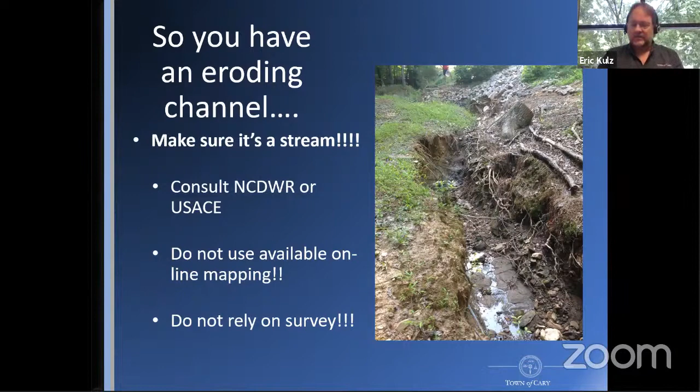This is indeed a stream, but you want to make sure that it's a stream. So the first thing you should do is consult the State Division of Water Resources. They have positions at the regions specifically involved in going out and doing stream determinations to figure out if what you have in your backyard is a stream or if it's just a ditch or some other kind of stormwater conveyance. One thing you do not want to do is depend on various online mapping to determine whether something is a stream or not. You also don't want to rely particularly on a survey. And I'll get into that a little bit more in just a little bit.

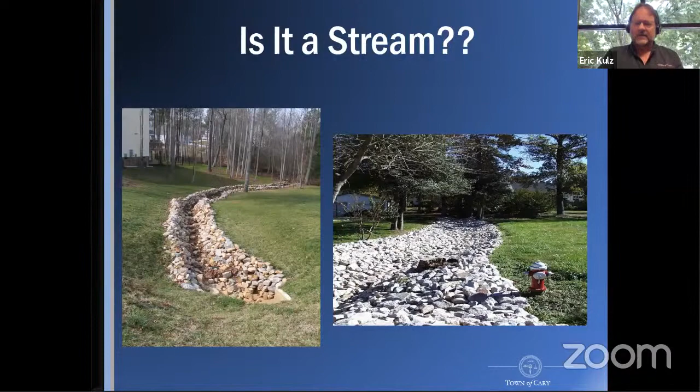So here's a couple of different drainage features. The one on the left is not a stream. It's just a drainage conveyance from a culvert. The one on the right actually is an intermittent stream, but you can see they both look pretty similar. So that's why it's really important up front, before you decide to do anything, certainly before you start doing any kind of digging or placement of rock, find out whether it is a stream.

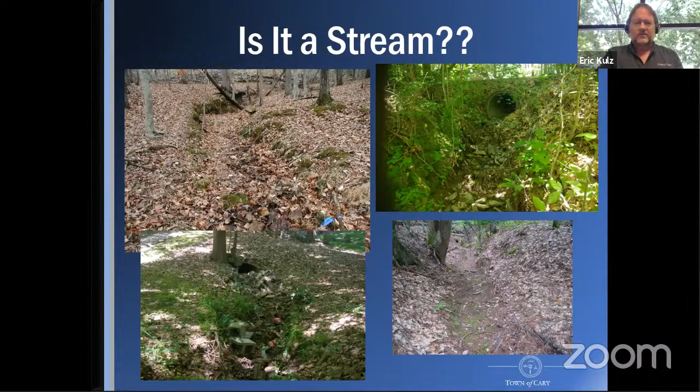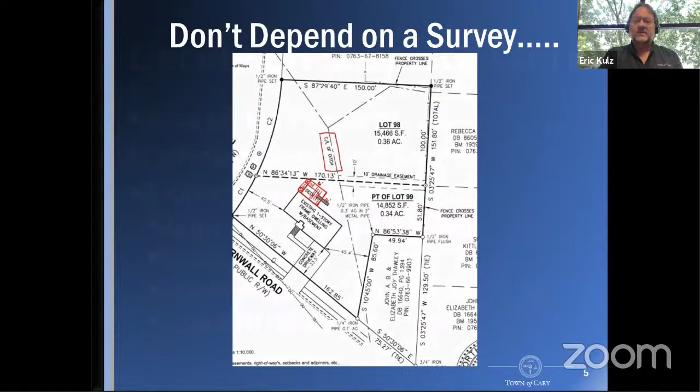You've got to decide on a scope of work for your project. Why are you doing the project? Are you stopping erosion? What's the purpose of the project? What are the limits of your project? Are you just doing it on your own property in your backyard?

Do your neighbors have similar issues, and would there be some advantage, or would it be good to combine projects and do it with a number of your neighbors? You have to identify your project constraints. Lyle's going to talk about some of the regulatory considerations, whether you have to get permits or what kind of permits you need. You have to look at things like access issues.

Do you have the ability to get a piece of equipment down to your property? Is it going to come across your property? Is it going to come across neighbors' properties? Is it going to come in through HOA property or even town property? Are there easements and encroachments that you have to worry about? Do you need to get encroachment agreements? And cost is most certainly something that you're going to need to consider before heading too far down addressing an erosion issue in your yard.

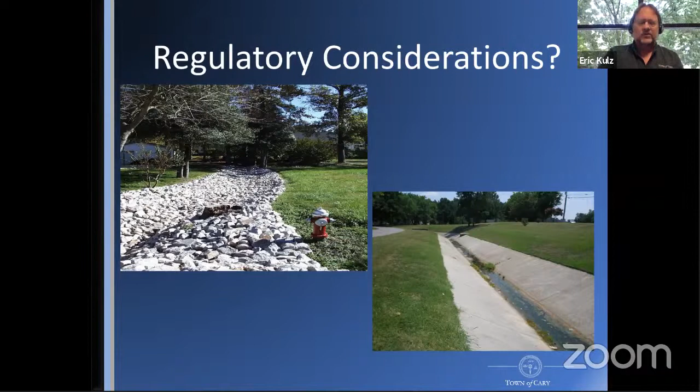The town's going to have something to say about that, depending on how deep the sewer line is, whether it's a ductile iron line or a PVC line. And you may need to get an agreement. You may have to get a permit or enter into an encroachment agreement to use that sewer easement to come down here to do work on your property.

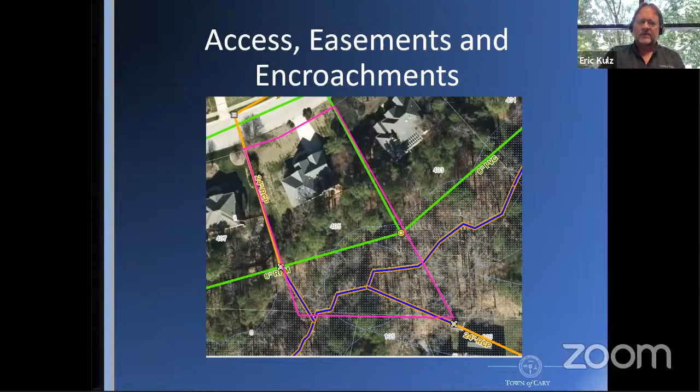It's important to figure out whose project it is. Okay, if this is in your backyard and you've got an exposed sewer line, guess what? That might not be something you need to do. It might be something that the town will come in and do. So again, it's really important early on to have someone from the municipality come out and take a look, because if it's an exposed sewer line, that's not yours to fix. That may be something that the town will fix.

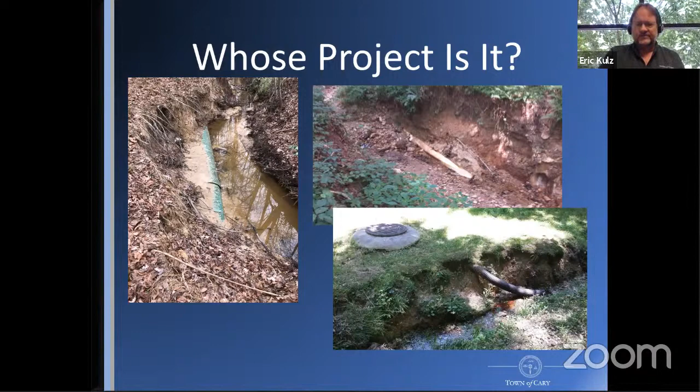So again, municipal considerations. What kind of things is your town going to be looking at? Are there utilities in the project area that they're going to have to take a look at and possibly impose some restrictions on what you can do? Things like how heavy your piece of equipment can be or how it's going to get down to your property.

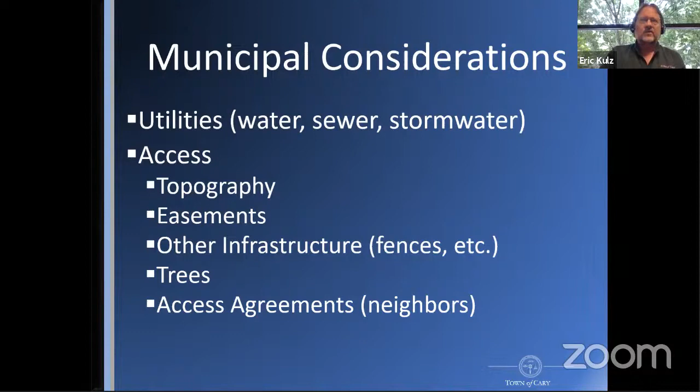We're gonna look at topography and easements and other infrastructure. Are there fences and things that you're going to have to look at? Are you going to need to cut any trees? Cary has some champion tree ordinances that if you have a really big tree, we may not want you removing that tree. And then you may also need to get access agreements with neighbors if your contractor, in accessing to get down to the back of your property, is partially crossing onto neighbors' properties.

So here's a residential lot. You see here on the left-hand side is from our GIS. Now the stream channel is shown off the property, but in this specific case, it was actually on the property. So the little red circle denotes where the citizen wanted to do some stabilization. It was a small area, but you see when we turn on our utility layer, we've got some sewer lines in there. So here's a survey of the property, and you can see the sewer easements along the back of the property, a drainage easement along the back of the property.

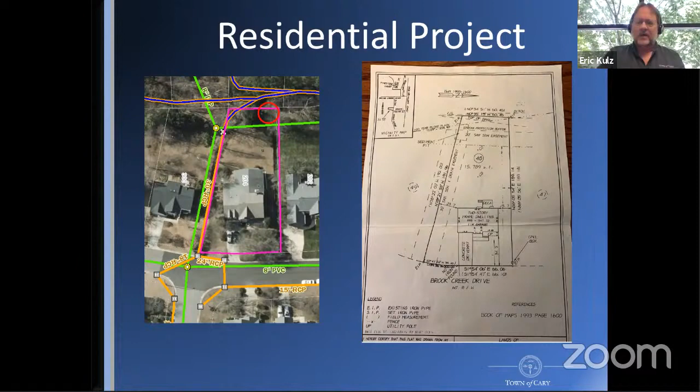So we asked the citizens, said, well, we would like to see a plan of what you want to do, since you will be working close to our sewer line. We want to see how you're going to get down to the property. So the citizen had their contractor draw up some plans. So here's a cross-sectional plan. You see he's planning on doing work on just one side of the stream. And they're going to stabilize this bank that was eroding back toward his house. And here you see a kind of an overhead view.

Here's the stream down here, and here's the area where they're planning on placing rock. And then here, or actually, this is not overhead. This is a view facing, so as if you're standing here and facing the work area. And then here's your overheads where they've got this stream bank erosion here. Oh, here they're showing where they're placing the rock.

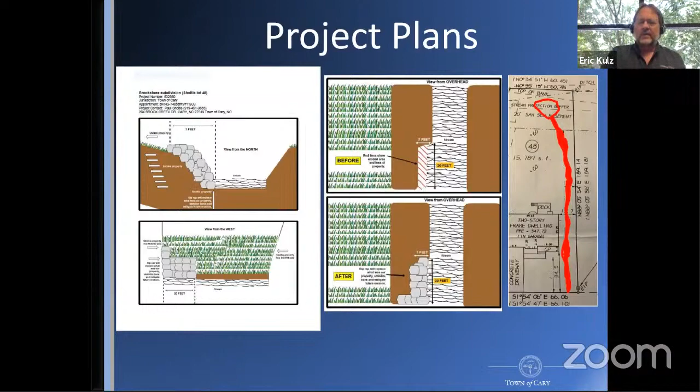And then finally over on the right here, you see, we said, well, you've got an easement and a sewer easement along the left side. We're concerned about you bringing equipment down there. So they showed us this survey with the red markings, which shows they're going to take the equipment down the right side. That's the kind of stuff that we want to see when they come in to talk to us about the project.

Okay, here was an HOA project. This again was in my neighborhood. You can see here that the stream is eroding up to this greenway. This is a private greenway. This is owned by the HOA, and they were concerned that the greenway was going to get undermined. Now there is a sewer line through here, and they did come to us and say, so you have a sewer line in here. Is it something you need to do anything about?

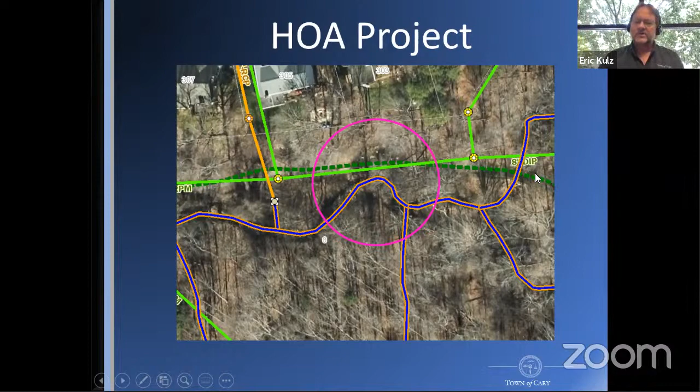And the town came back and said, the sewer line's pretty deep. The stream's not up to it yet. So as far as the town's concerned, they're going to just watch and wait. But the HOA felt they needed to go ahead to protect their greenway. So they went ahead with the project. Here's an overhead view. There's that sewer line running along there. This is the area where they were going to do the stabilization, and the greenway trail comes right through here as well.

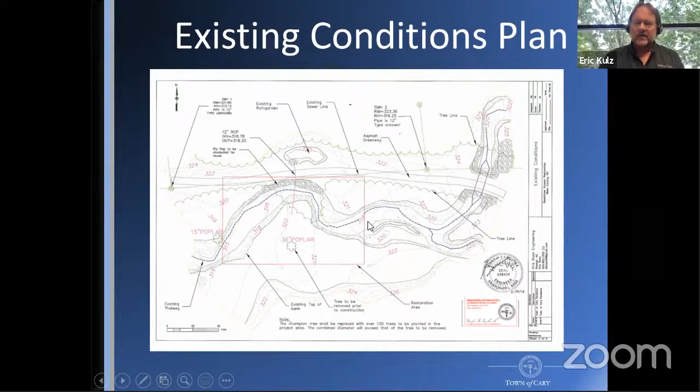So they actually brought in an engineer on this project who prepared some plans. Okay, you can see here's the area of concern where it's eroding. There was some riprap placed there, but the riprap was not doing the job. Here's the plan showing what they intended to do. The former path of the creek was up this way. You can see they're going to come in here. They're going to reconstruct the channel further away from the greenway.

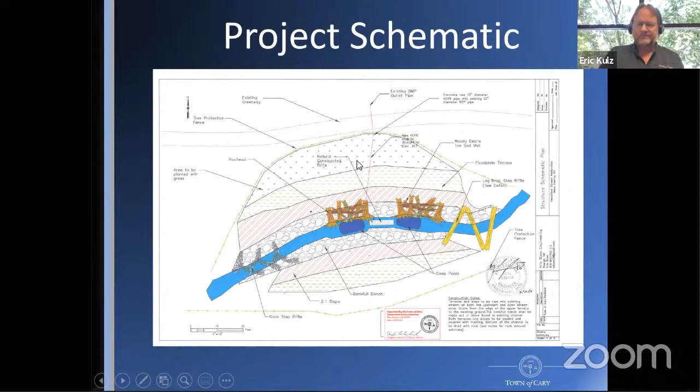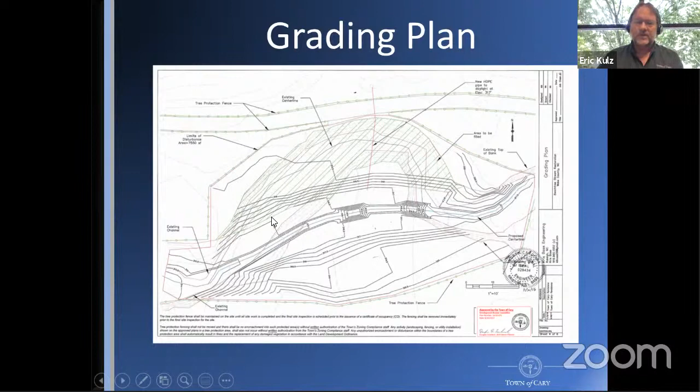And then these are just different areas where they're going to be doing filling. They're going to create a floodplain terrace and plant that up, and then a fill slope here. And then here's their grading plan where they're showing, here's the old channel. They're going to backfill here. This is showing the new slopes and the relocated channel.

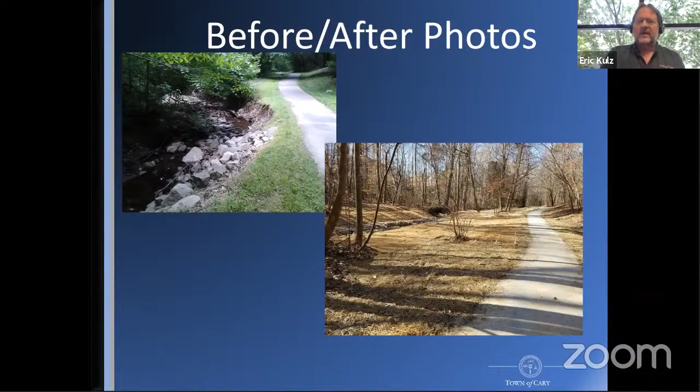This project was paid for totally with HOA funds, but it's still the type of project that we're talking about with the CCAP program. And they had to submit all those plans and stuff so the town could really take a look at what kind of work was being proposed.

So in summary, if you think you have a problem in your backyard, contact your municipality, probably someone in stormwater or engineering, have them come out and take a look at what you have. Got to figure out, is it a stream? Because if it's not a stream, you probably don't have any permitting issues. There's a lot more flexibility if it is just a ditch or a drainage way. Is it a problem that needs fixing?

Sometimes streams naturally erode. That's something they do. In some cases, while you have some erosion going on, it's very slow. It's not really doing any damage, and it's not necessarily something that requires a resource to be put to it. You want to develop a scope of work. Are you going to do it yourself? Are you going to hire a contractor or a consultant? And then what are your costs, and are there options for funding?

You have the CCAP program through Soil and Water Conservation. You have a number of programs available through the state that may be open to you, maybe not as a backyard project, but if it's an HOA project, a larger scale project. You need to figure out what kind of permits and permissions you're going to get from the federal and state agencies, and what kind of submittals you're going to have to the municipality. In the town of Cary, you don't necessarily need permits, but sometimes you're going to have an encroachment agreement if you're using a sewer easement to come in.

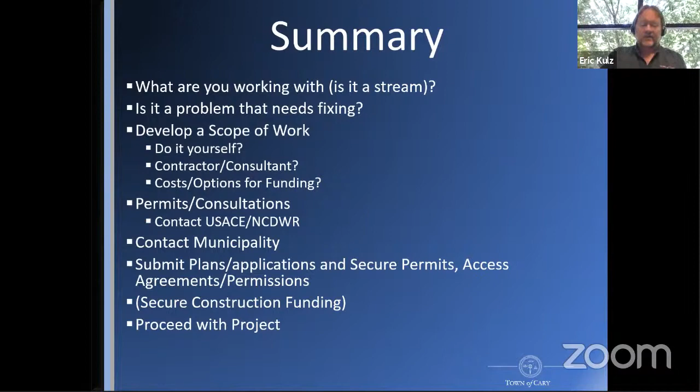Then you secure your construction funding if you are getting funding from an outside source. And once you get all your approvals, then you proceed with your project. So if there's any questions, I'm available to answer them.

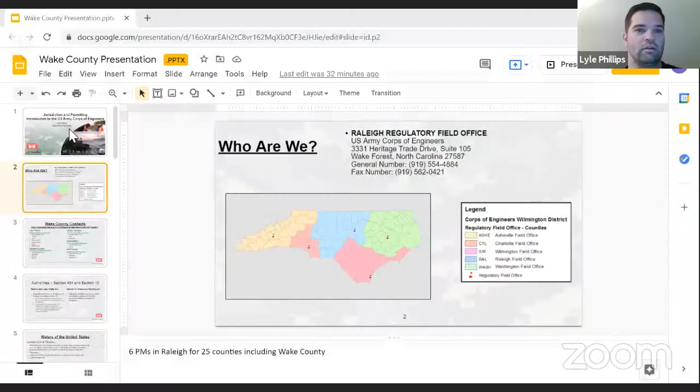Can you see my screen now? Yes, we can see it now. Okay. Sorry, I'll have to start over.

No problem. Again, Lyle Phillips with the Army Corps of Engineers. Introduction to the Army Corps of Engineers. We're going to talk about who we are, some of our authorities, the jurisdiction of the Army Corps of Engineers, as well as some permitting.

The Raleigh Regulatory Field Office is located in Wake Forest. Look in the left-hand corner here. You'll see the state of North Carolina is divided into 5 areas with 5 regulatory field offices. The RFO, there in the middle, you can see the counties outlined in blue are what the RFO is responsible for. Currently, we have 6 project managers in the RFO, and I think we are responsible for 25 counties at the moment.

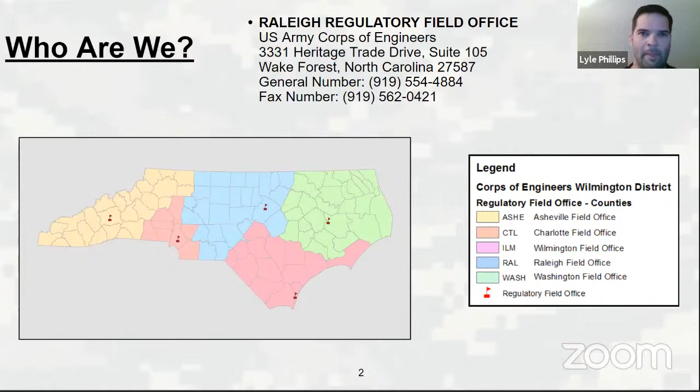Getting into authorities. The Clean Water Act was developed to restore and maintain the integrity of the nation's waters. Within the Clean Water Act, Section 404 established a permit program to be administered by the Corps of Engineers. Under Section 404, the Corps of Engineers regulates the discharge of dredged or fill material into waters of the U.S. Under Section 10 of the Rivers and Harbors Act, the Corps regulates activities in, over, and under navigable waters.

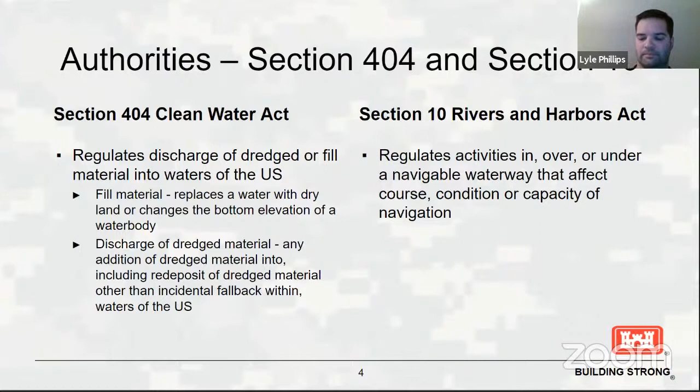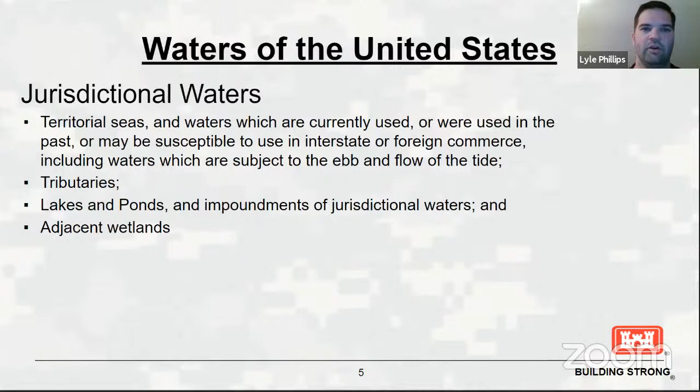Waters of the United States, jurisdictional waters, they're all used kind of interchangeably. I'll probably continue that throughout. They all mean the same thing. And what I'm talking about is territorial seas, tributaries, lakes, ponds, and impoundments of jurisdictional waters, and adjacent wetlands. I'll note that this is what is jurisdictional right now.

Now that we've gone through what is jurisdictional, it's also important to note where our jurisdiction starts. The term we use is ordinary high water mark. That is where the Corps' jurisdiction starts for certain features. In Wake County, there are areas that have riparian buffers. That can be a state implemented thing. It can also be by your local municipality. Just want to make it clear, the Corps does not determine or regulate riparian buffers.

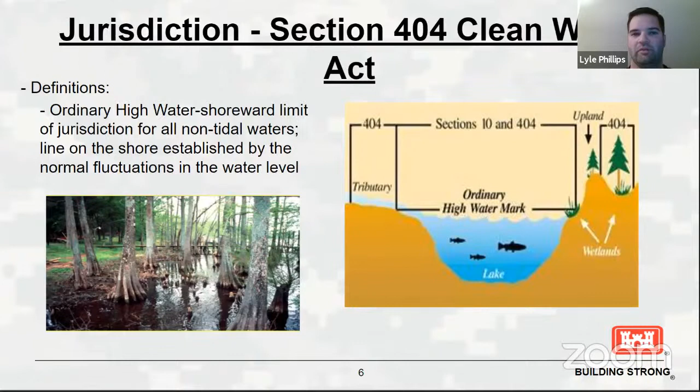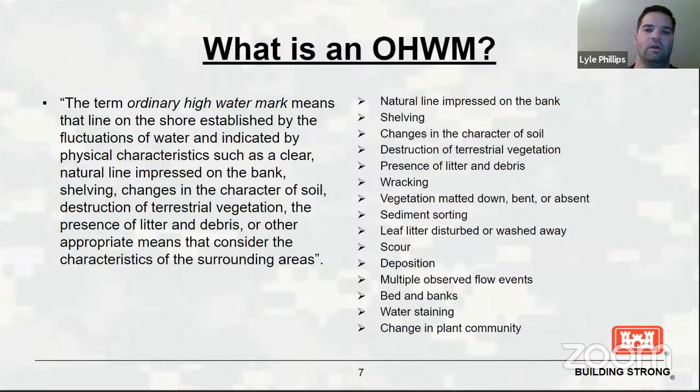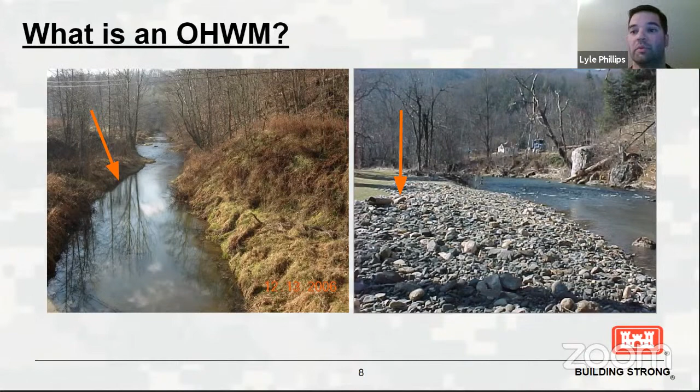Here are some examples of some smaller systems. So again, strong bed and bank, pretty obvious on the left hand of the slide, not so much on the right hand. But it's important to note that this is more common what we see. There's very little question about the first two images. These two, more common and can be more difficult.

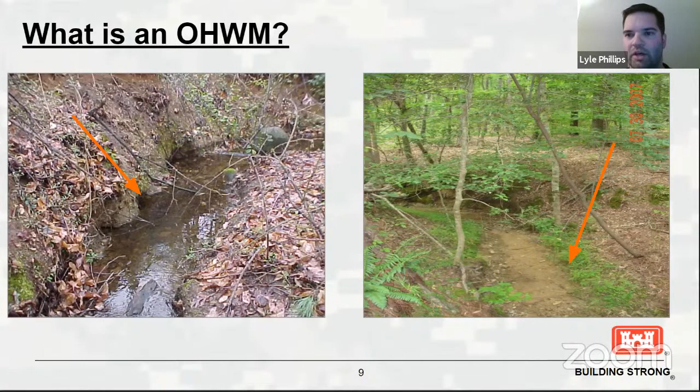I think it's also important to note there's no water in the image to the right-hand side. That doesn't necessarily mean it doesn't have an ordinary high water mark. With the indicators on the previous slide, in this area you have a change in plant community. You probably have a change in soil characteristics. You may have sediment deposits. Those are all indicators of ordinary high water mark.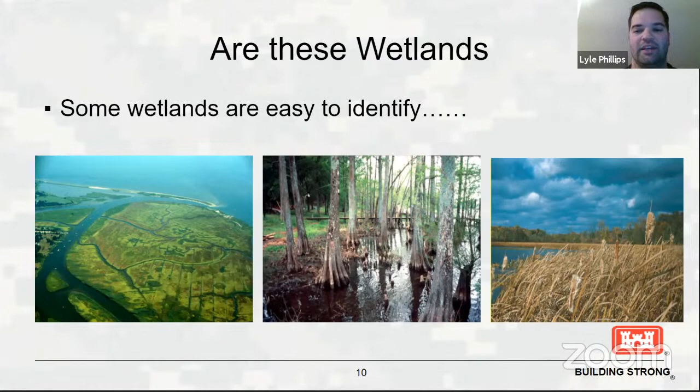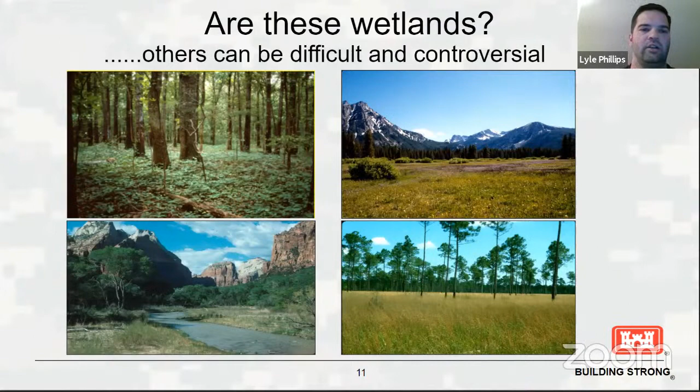Wetlands. Some wetlands are very easy to identify. Like streams, cypress swamps and wetland marsh, they are very clear. Others, not so much. Particularly in Wake County, what we're going to be looking at most often is similar to the image in the top left-hand corner. This is characteristic of a bottomland hardwood forest or a headwater forest wetland. These are most common in Wake County, and it may not be obvious that you have a wetland on your property.

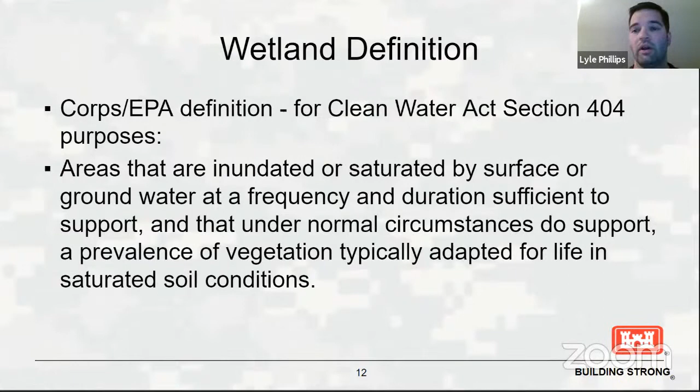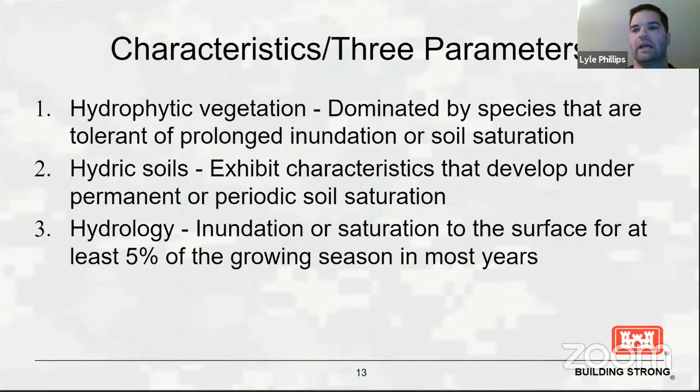The definition of a wetland, I think the takeaway from this is inundation and saturation frequent enough and for a sufficient duration that vegetation will prevail in saturated soil conditions. So that is what we are looking for, and how we do that is by these three parameters. The Corps uses a wetland determination form. We fill that out in the field. So it's boots on the ground. It's something that has to be done physically. We'll be looking for hydrophytic vegetation, hydric soils, and hydrology at a certain area.

So once we establish if there are jurisdictional waters on the property and potential activities may impact these, then we get into permitting. Types of permits. Individual standard permits are for larger scale impact projects. These are for projects whose impacts are more than minimal. They exceed the thresholds of the nationwide permits or the regional general permits.

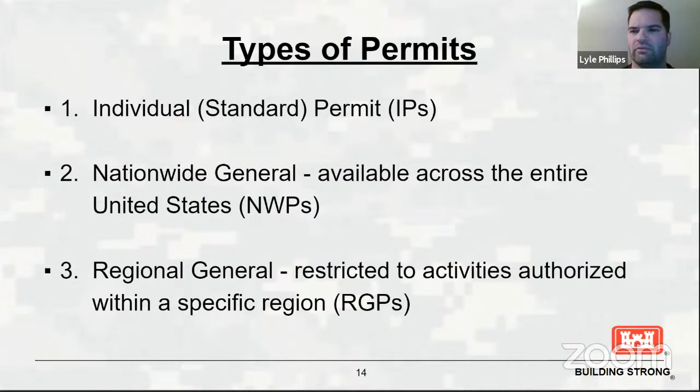Nationwide permits, we're going to talk about those more in depth. They are by far the most common. They're most common in Wake County. Regional general permits are specific to a certain region, specific to a certain activity in that region. I believe we have 12 regional permits at the moment.

Nationwide general permits. We currently have 58 nationwide permits. These are for commonly recurring activities that have minimal cumulative adverse impacts. Nationwide permits have standard conditions, regional conditions, and may or may not have special conditions. Some require notification to the Corps. Some do not require notification to the Corps.

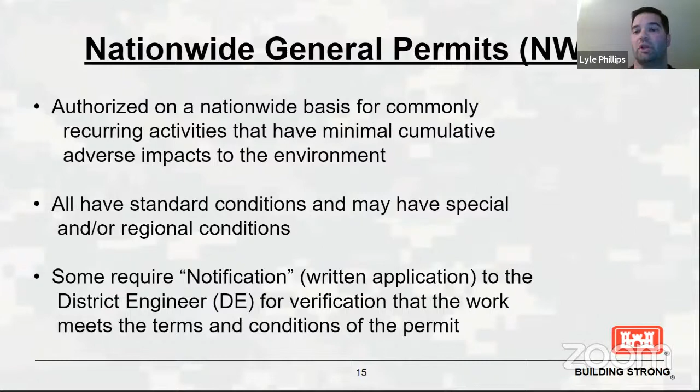It's important to note that if your project does not require notification to the Corps, you still have to follow the conditions of that permit. So you are operating under a permit, even if you do not have to tell the Corps that your activities are taking place. Those conditions still apply. We're going to go through some common permits in Wake County. This will lead right into Eric's presentation.

This is very common for eroded streams. Nationwide Permit 13, Nationwide Permit programs for common activities. This is for bank stabilization. As with all nationwide permits, there are conditions. I've put some of the ones for Nationwide Permit 13 here.

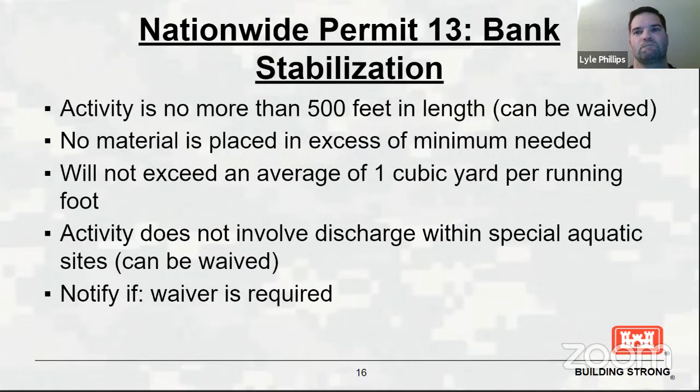Nationwide Permit 29. This is for residential developments. It's for single residential, multiple residents, and even large scale subdivisions. Nationwide Permit 29 has threshold limits for loss of non-tidal waters, stream bed, and total waters. It's important to note that you must notify for all projects that require a Nationwide Permit 29. It's also important to note that we look at the total project.

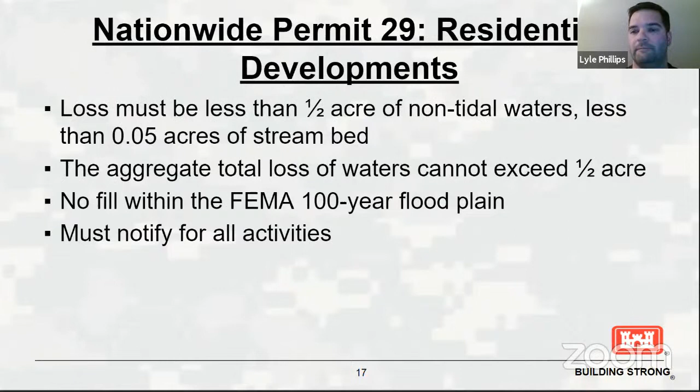In Wake County, there are a lot of phased residential subdivisions. When it comes to permitting for the Corps of Engineers, we look at the complete project. So when you come in for an application, you should account for all impacts for that residential development. You cannot piecemeal it by phase.

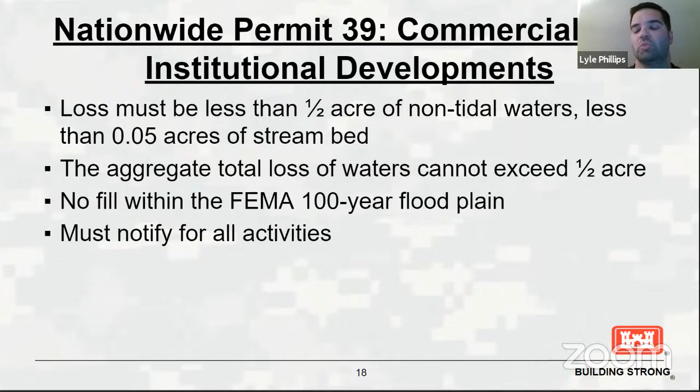Nationwide Permit 39 for commercial and institutional development. Conditions are similar to the 29. Thresholds for losses of non-tidal waters, stream bed, and total waters. This can be for small scale commercial up to very, very large projects. Again, we're looking at the total complete project. Cannot be piecemealed.

Nationwide Permit 58. This is for utility line activities for water and other substances. This is also applied to sewer, stormwater. Oil and natural gas are authorized under Nationwide Permit 12, and electric and telecommunications are under Nationwide Permit 57. One important note about Nationwide Permit 58 is that there must be no change in pre-construction contours of waters.

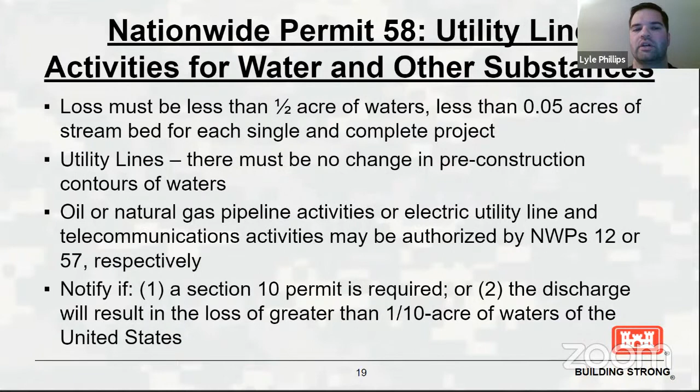Nationwide Permit 3 is for maintenance, and this is for repair, rehabilitation of any previously authorized structure. That's important to note. This is not for an unauthorized activity. If you need maintenance that is similar to what was previously authorized with minimal difference, then Nationwide Permit 3 is an option, but it must be previously authorized.